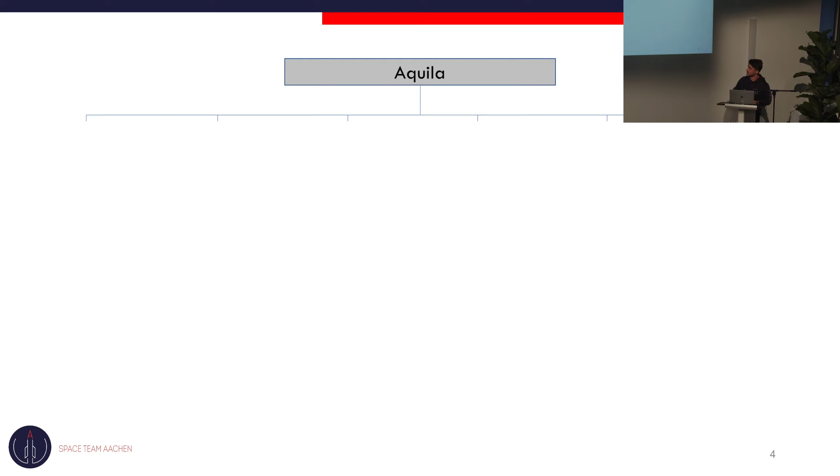So we have the mentors. The mentors are 3 people that already participated in EuRoC 2020 and 2021 and support us with their knowledge and some inside information that we need for the designs.

Then there's us, Tobias, Sandra, and me. We do the systems engineering and team leads. We keep track of the interfaces in our system, as well as that the timelines are correct and all the deadlines are met, these kinds of things.

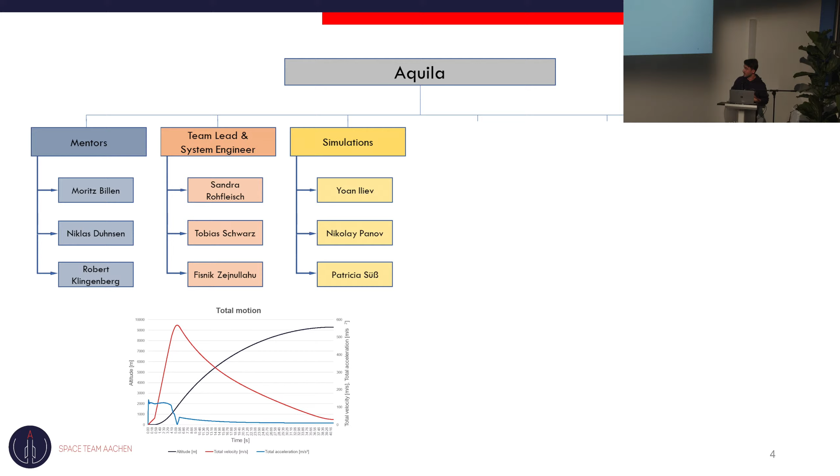Then, of course, the backbone of every rocketry, we have simulations. Simulations will predict our flight data, our trajectory path, and they are consisting of 3 people.

Then we have structures, of course. For the aerostructure, we need to have a team, and we have 5 of them who make body tubes, nose cones, boattails, and so on and so on.

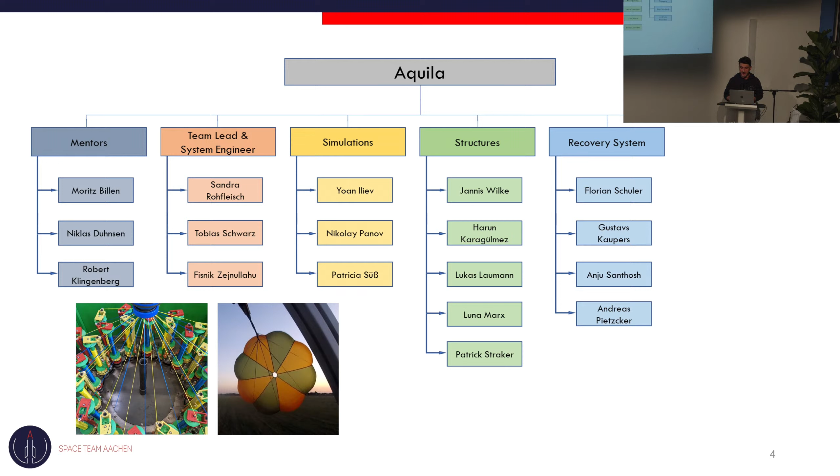Then we have our recovery system. We want to get our rocket back, and that's why we need a recovery system. For that, we have 4 people currently, and finally we of course have our avionics team that tracks all the data during the flight and also keeps track of our telemetry so we can find the rocket after it has safely landed.

So let's go on with our timeline. We actually started our project in November 2021, and we had quite a little hiccup in April when we wanted to participate at the EuRoC, but couldn't.

It was a little bit of a hiccup because we then decided, hey, what if we take more time and just have a better rocket that we can then launch in America as the first team ever, first German team ever to participate at the Spaceport America Cup.

So then we had an internal PDR where we presented our design to Space Team members. Then we had an external PDR where some of you already were in October. After that, we had the SAC application where we managed to be part of the 150 teams that participate there. And now we're here at the CDR.

Hopefully the feedback and the insights from the review board will not be too big so that we can freeze the design end of January and go into the production and assembly phase.

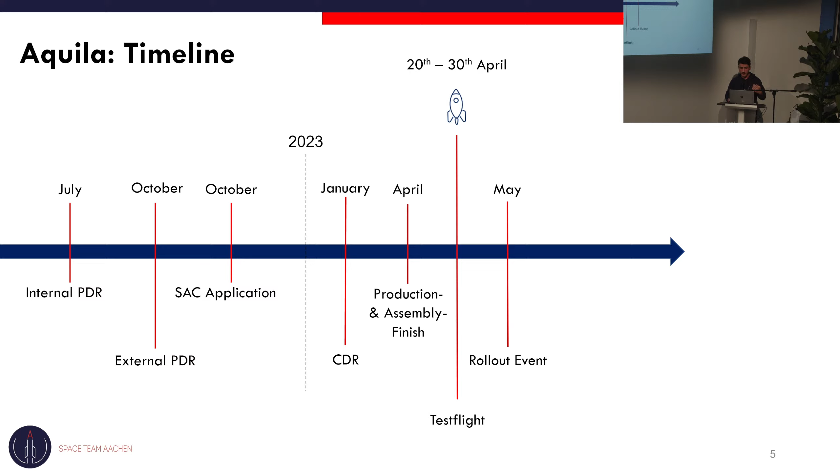And finally, in June, we will have the Spaceport America Cup in 2023. If we manage to get the rocket home safe and sound, we still want to participate at the European Rocketry Challenge 2023 and try to do what we already wanted to do last year.

Let's get into finances and sponsoring. Just a quick word about that. The blue things are traveling costs, the red things are costs that we need to build the rocket, on the left side. On the right side, that's our funds. You can see that we're missing about 11,000 euros, but that's because we didn't account for sponsoring, for material sponsoring and machining sponsoring. So that's more or less covered. We also cover part of the traveling costs with our personal money, because you can't bring everyone with the funds that we have to America.

So we're also paying our own money, and we are still in the process of getting funds by searching for foundations and applying for funds.

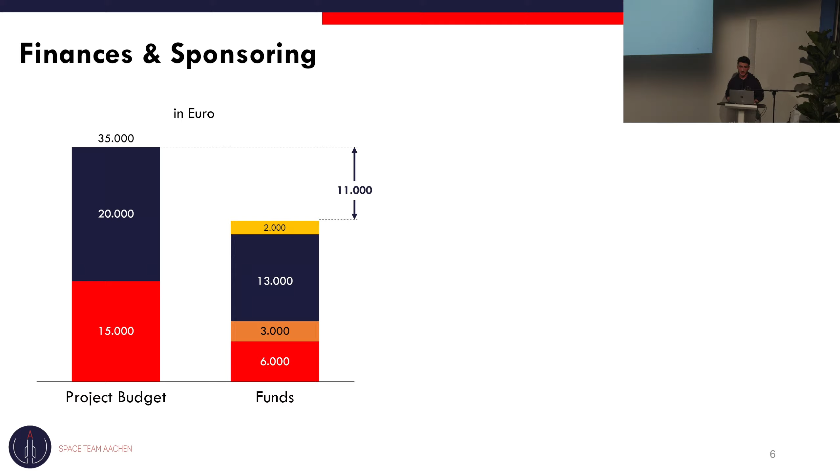Here are our supporters and our sponsors. Quick shout out to all of them. Materials and machining is really what saved us and made us our rocket.

So then I will give to Tobias.

Thank you, Fisnik. Also, hello from my side. First off, I want to thank you for attending the presentation, whether it's in person or by joining our online session. My name is Tobias. I'm one of the systems engineers of the project, and I want to talk with you about the key requirements that need to be fulfilled in order to participate at the Spaceport America Cup. I also want to give you a quick overview of our rocket design, and before we dive into our subsystems, I want to briefly show you the flight profile with a little animation.

So for the requirements, we have them divided into general requirements and specific flight requirements. Usually these kinds of competitions are divided into two categories, the 3 and the 9 kilometer category. The goal is not to fly as high as possible, but to reach a targeted height as precise as possible. Since Space Team Aachen already flew twice in the 3 kilometer category with CAR 1 and CAR 2, as Fisnik mentioned, we now set a new goal to fly in the highest possible category at the Spaceport America Cup.

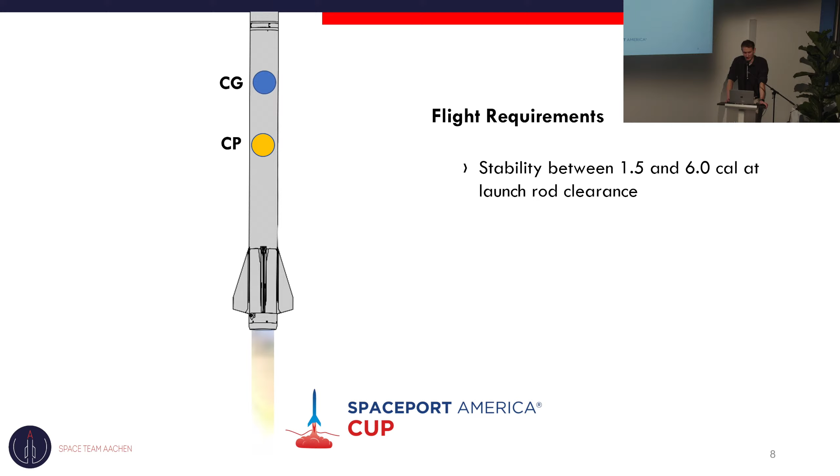So when the motor starts to burn, the center of gravity starts to move upwards, and therefore the stability increases. When we move faster, the center of pressure moves down, and the stability again increases. When we reach maximum velocity, the center of pressure moves upwards again, and therefore the stability decreases. So you can see the stability is not fixed and varies during the flight.

So why is it a problem when the stability is out of this range at launch rod clearance? When we are over 6 calibers, the rocket is referred to as overstable and therefore more likely to move into the wind, so you don't really want that. When the stability is under 1.5 calibers, it is referred to as understable, and the rocket tends to turn, even could turn towards you. That's normally something you want to prevent.

We also need to have a dual event recovery system where our drogue parachute is ejected near apogee. We need to have a descent speed of 23 to 46 meters per second with the drogue inflated. Our main ejection shall happen below 457 meters, and with the main ejected and inflated, we need to have a descent speed below 9 meters per second.

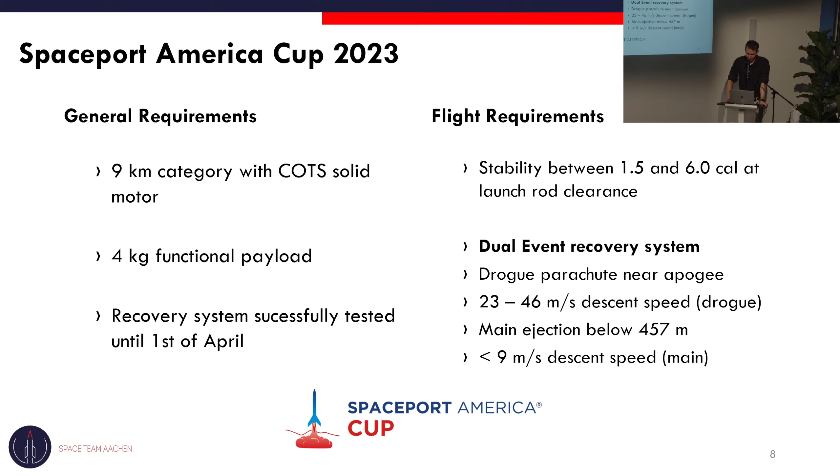So next I want to talk about our general design. That's how the rocket will look like. We will have a length of approximately 3.4 meters and a diameter of 11.4 centimeters. Our wet mass will be around 32 kilograms, that's with the propellant, and when the propellant is burned, we will have a dry mass of 21 kilograms.

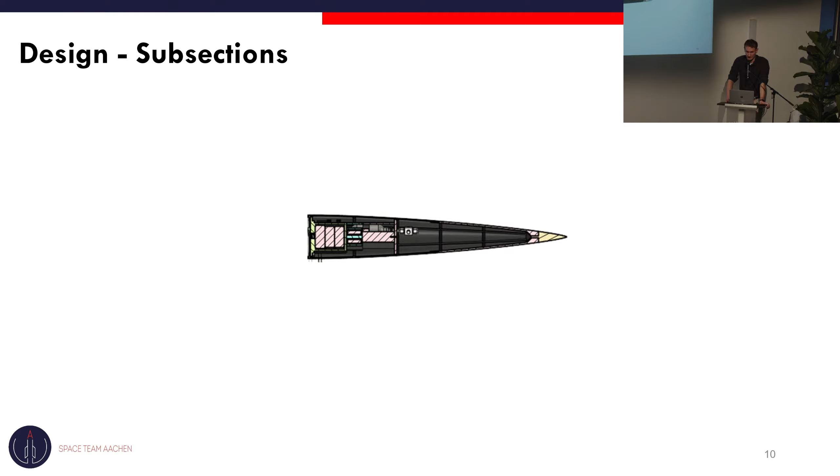So first start with the nose cone. The nose cone consists of the nose cone tip and the nose cone body itself. The tip is made of aluminum and functions as a heat absorber. Also, we have a heat and a pressure sensor located inside.

Then we also have the tower located inside our nose cone and our avionics tower, and part of the ejection system of our recovery system, the CO2 tanks are also located there.

When we go further down, we have the recovery bay, and we also have the nose cone bulkhead. So what is a bulkhead? A bulkhead basically connects and separates the different sections of the rocket and therefore allows easy access of each section. The convention we have is that we call the bulkhead below the nose cone the nose cone bulkhead, and for example, the bulkhead below the recovery bay the recovery bulkhead. So every time we talk about bulkheads, you hopefully know now which one we are referring to.

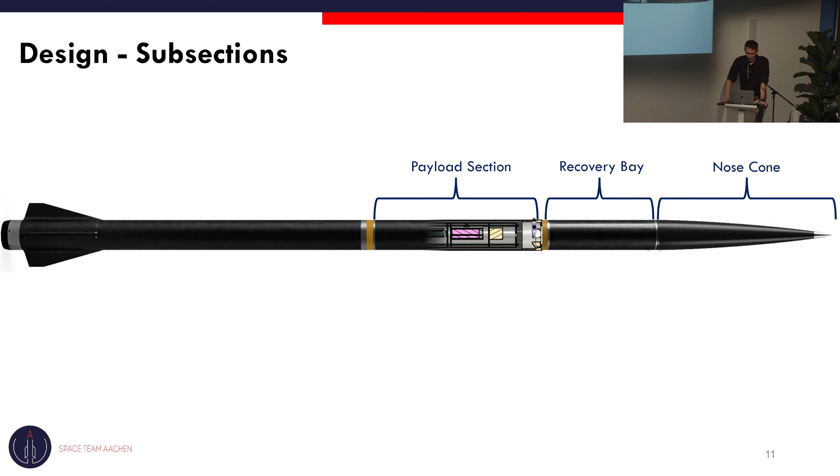Inside the recovery bay, we also have our parachutes located, and below the recovery bulkhead our payload section. For the payload, we will have a CO2 experiment where we basically suck in air during the flight and measure the CO2 concentration.

Below we have the payload bulkhead where we have one of our launch lugs. The launch lug is basically there to guide the rocket during the liftoff at the launch rail.

Below that, we have the motor section where we have our solid motor, the fins attached to the motor section tube, and the motor bulkhead where we have our second launch lug. Then we have the boattail, and the boattail is there to reduce the drag during the flight and to hold the weight of the rocket.

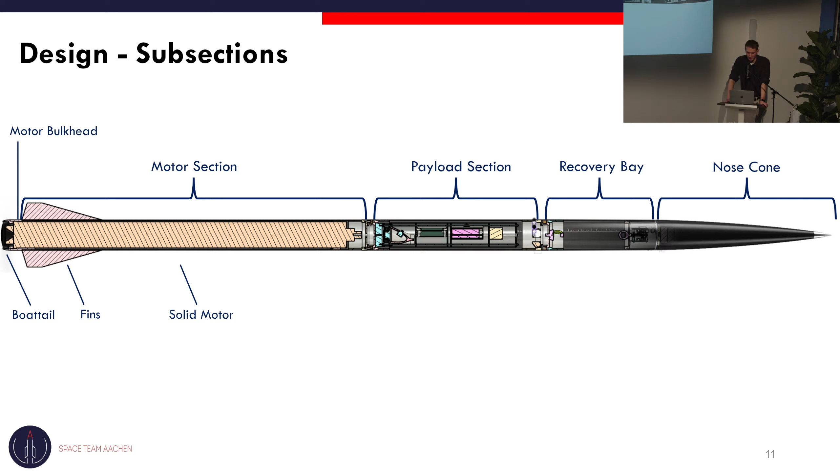So here you can see a full cross-sectional view of our rocket. Before I go to the flight profile, I will just mention some stats about our motor. We will have a Cesaroni N3301 motor with 19.3 kilonewton seconds total impulse and a peak thrust of 5 kilonewtons.

We will therefore, with that motor, have a maximum velocity of Mach 1.68 and will slightly overshoot with 9.3 kilometers altitude. Our maximum acceleration will be 15 g, and we will have overall stability during the whole flight of 2.9 to 6.4 calibers.

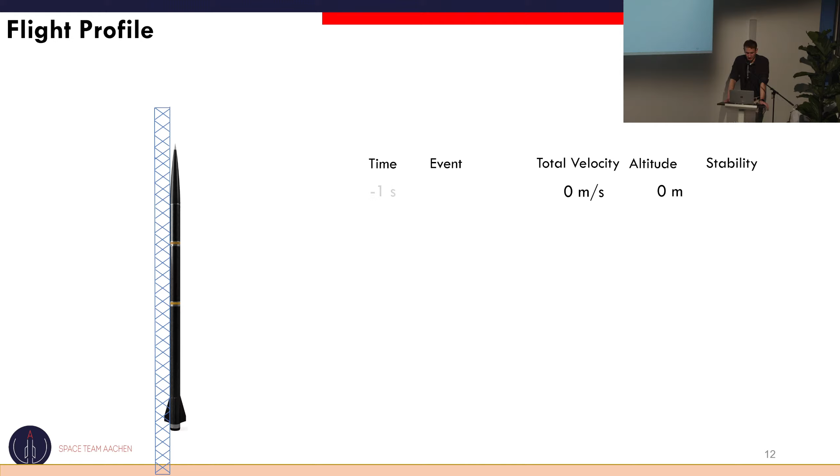The first event will be the liftoff, where we will have 2.9 calibers and therefore meet the required 1.5 to 6.0 calibers at launch rod clearance. After that point, we reach maximum velocity at an altitude of 1,700 meters, and afterwards we will have the motor burnout. After 10.4 seconds, we reach maximum stability, which is the mentioned 6.4 calibers, and we will reach apogee after 41 seconds.

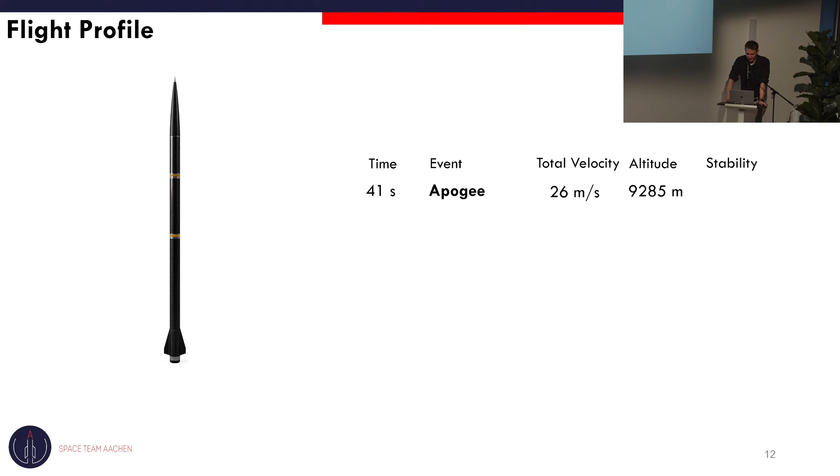One second later, we will deploy the drogue parachute. With the drogue deployed, we will have a velocity of 24 meters per second. Afterwards, with the main deployed, we will have 8 meters per second, and then touchdown after 369 seconds.

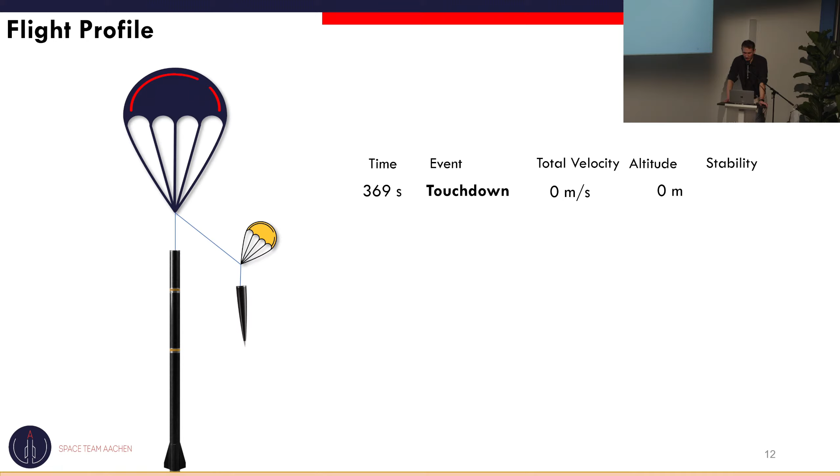I'm the lead of the simulation sub-team for the rocket Aquila. I'll be presenting the system data. Thank you for attending, and thank you to everyone who is online.

First, we're going to go to the simulation models and programs used in analyzing the rocket. Then we'll go to the flight profile and flight parameters, and the force profile as well. We're going to take into account wind influence, do a software comparison which was the target of the simulations team, go over our CFD results, and finish with the timeline for the simulation sub-team.

The simulation sub-team was focused on analyzing the performance and behavior of the rocket. This is our first supersonic project, so it was a challenge to determine a methodology for simulating our supersonic rockets. This was our task: to develop and establish a methodology for the space team to use for future projects, including supersonic rockets.

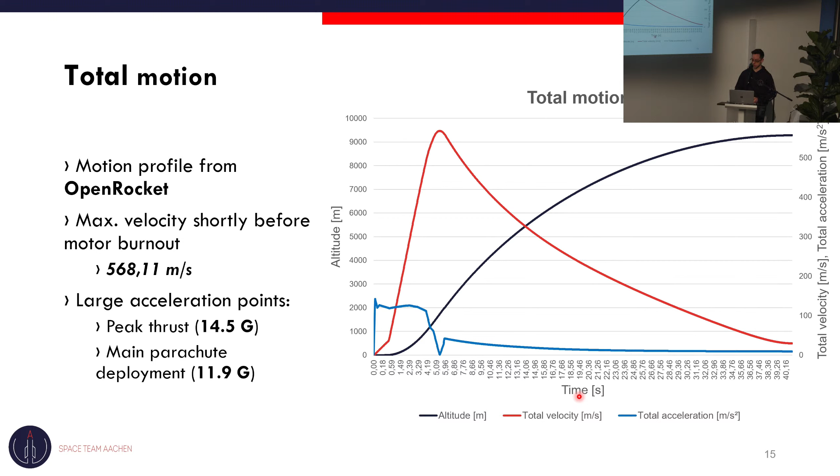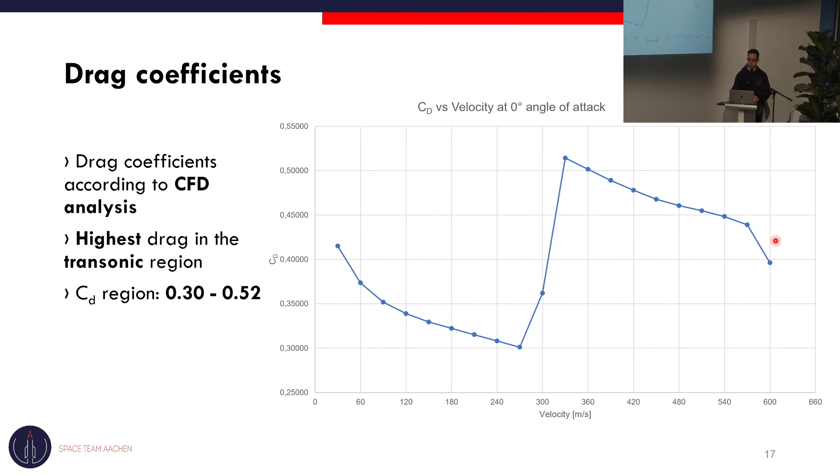Then we pick up speed, our drag increases, and our drag at max Q, that means maximum aerodynamic loads, is about 750 newtons. The other main load on the rocket will be the main parachute deployment. It leads to a large deceleration, about 2 kilonewtons.

And then we're going to land the rocket with the main and drogue chutes deployed, and we're going to land it at about 8.1 meters per second, which with our dry mass corresponds to a kinetic energy at landing of about 725 joules.

All right, this was the flight profile and the force profile. We're going to take a look at the wind influence. We also analyzed the winds to make sure that the loads on the rocket are not too high, don't cause vibrations, that the rocket is not overstable, and to look at what happens at high wind speeds. The maximum wind speed allowed for launch is 8 meters per second at ground level.

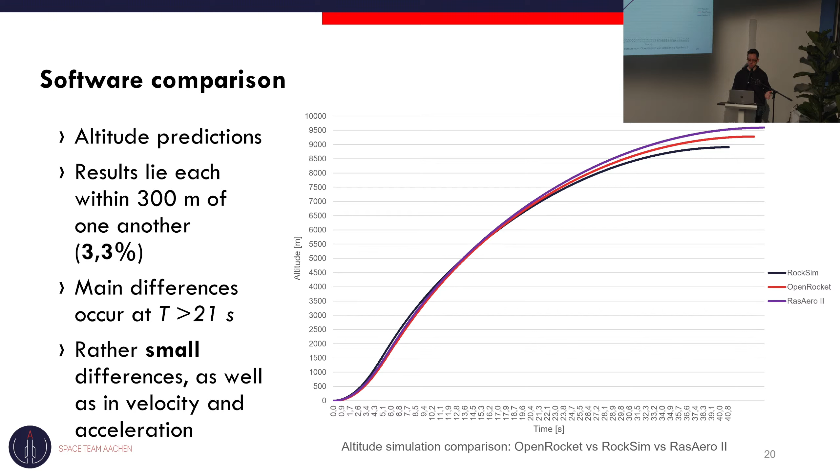And of all, CFD gives the lowest values, therefore we expect if the CFD results are successfully validated and correct, that the rocket will go actually a bit higher than those programs predict. Not a whole lot, but a little bit.

The other big difference is in the center of pressure and respectively in the stability. This is important for us because we need to dimension our fins and aerodynamic surfaces so that we are stable. As you can see, OpenRocket could be misleading in this way.

It says that the center of pressure is much further than the CFD analysis says. We were surprised that RasAero II and RockSim don't give any logical values. What I mean is that we expect the center of pressure to rise with speed, then drop as we go supersonic, and then go back up. Those two plots don't show it, but the CFD results show what we expect.

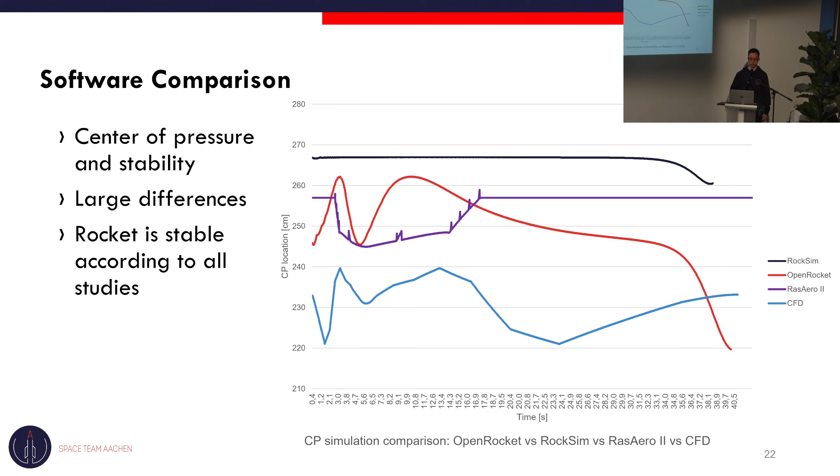The CFD results show that the center of pressure is much further than OpenRocket predicts, and therefore the stability can reach some lows. Those lows are not lower than 1.5 caliber, so the rocket is absolutely stable, and this is verified through the CFD analysis. We can also analyze the stability with OpenRocket, but we need to take all results with a grain of salt.

Last but not least, we're going to take a look at the computational fluid dynamics. We did this in order to evaluate the softwares we want to compare, and we wanted to get a better overview of the mechanical loads, the thermal loads, and the flow topology of the rocket that we can expect. So we're going to have a brief look.

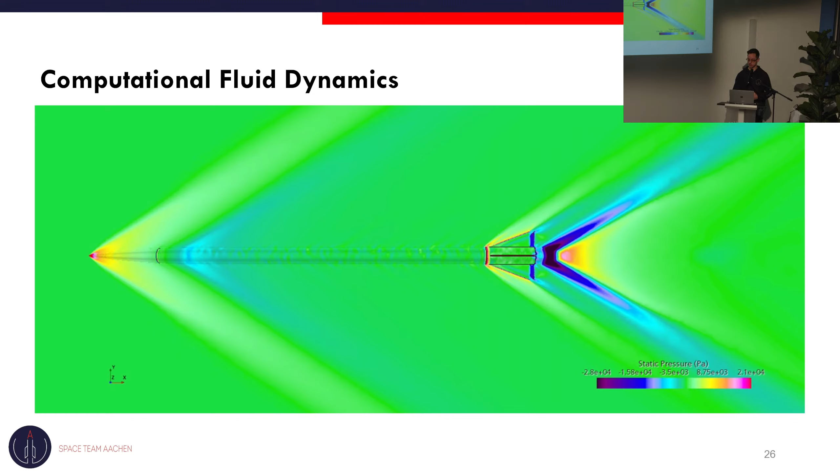With this, our system data chapter concludes. I want to talk briefly about the next steps of the simulation team. We plan to validate the CFD methodology. We're going to do a mesh validation and code-to-code validation in collaboration with the DLR.

Basically, the mesh validation is tested with different meshes so that we can determine if the mesh influences the simulation results in any way. And the code-to-code validation is to test the solver, checking if it predicts accurately the flow topology and the metrics.

After this, we're going to use the CFD results and integrate them into ASTOS, another trajectory simulation tool. We'll simulate the trajectory through ASTOS and compare it again with the other software. Then we're going to do Monte Carlo simulations for the prediction of the landing site.

After that, we're going to do a final simulation cycle with real-world data when the rocket is getting built. We're going to weigh each component, build even more precise models, and do a last simulation cycle.

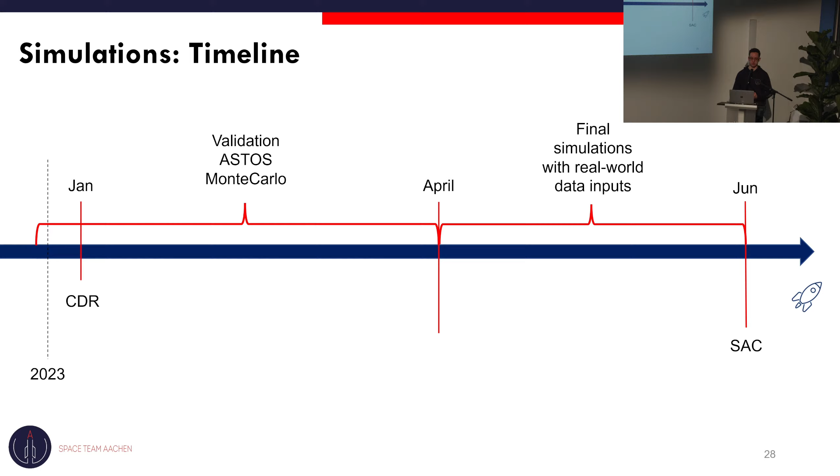So how are we going to distribute this in our timeline? We are here at the CDR. We are currently working on validation and ASTOS. Once we finish them, we're going to start with Monte Carlo simulations. Our plan is to get it all done by April. After that, when the rocket is built, we're going to take on the final simulations with the real-world data.

So that's it from my side. Thank you all, and I'll give over to Yanis with the structures part.

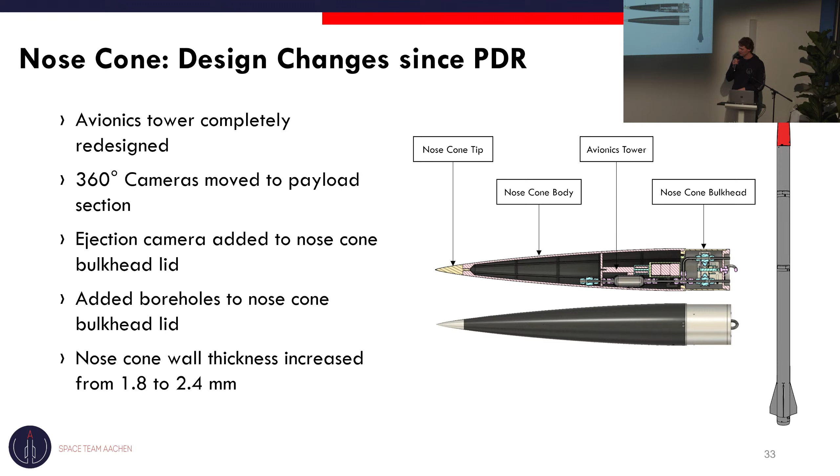Finally, we decided to increase the nose cone wall thickness from 1.8 to 2.4 millimeters. This is the nose cone. We selected an aluminum alloy. Other than that, not much has changed.

We are still a little bit uncertain of how we're actually going to manufacture these boreholes, as they are quite small, but have a high length. We are in discussions with the WZL, which is the Laboratory for Machine Tools and Production Engineering here in Aachen. We'll have a meeting about this next week.

But because this is just an auxiliary system of Aquila and not part of the critical design, if this ends up not working out, this is not in detriment to the overall success of Aquila, so it's not a main priority for us. Okay, moving on to the avionics tower.

This is the old design. And this is a new one.

As you can see, we've managed to, in my opinion, make the whole design a lot more elegant. We've shrunken down the whole design. It's a lot easier to print. It now features mounting points, for example, the CO2 tank.

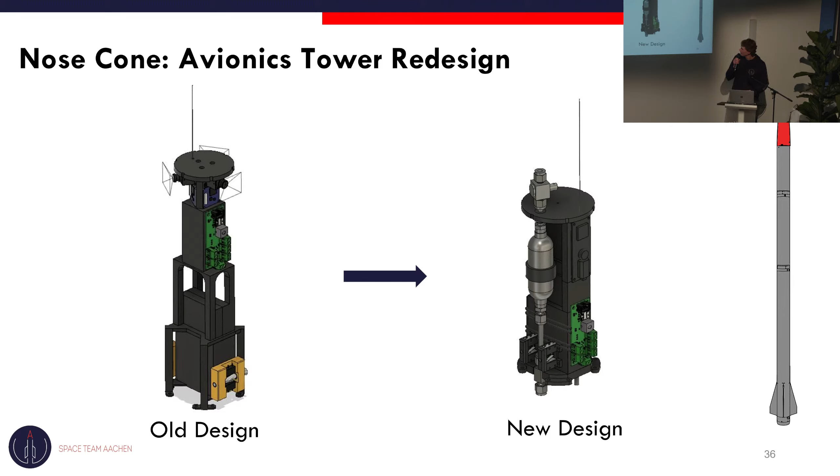And as you can see, it does once again feature all the components and features that we need to host all of the avionics and recovery systems.

Then the bulkhead, nothing much has changed for the nose cone bulkhead. We have selected an aluminum alloy, as you can see. And then finally, we did add some more boreholes to support additional functionality for the recovery team.

These are manufactured components that we have already assembled. We have assembled and manufactured every component of the nose cone except for the nose cone tip. And I do want to point out that we have at least 2 of each component, so we're already redundant and have spare parts available for everything.

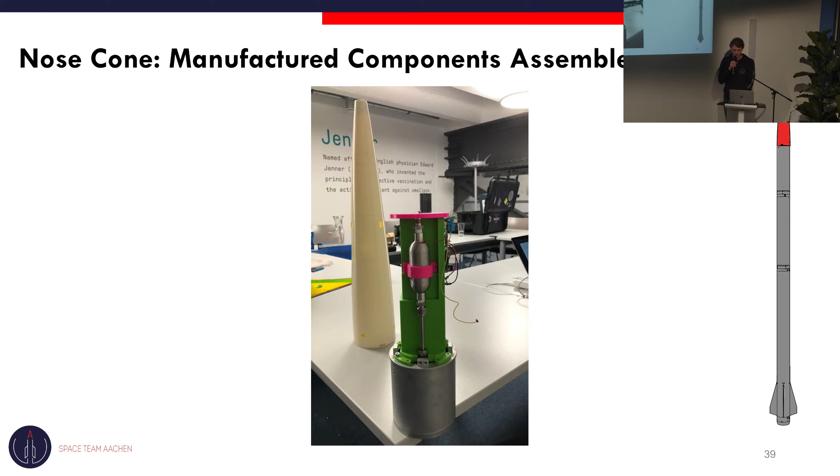Okay, so moving on to the body tubes. Maybe I'll give a quick recap for those who haven't attended the PDR. We wrote an entire project thesis where we compared different manufacturing techniques of how to produce carbon fiber reinforced engine tubes for rockets. In that project thesis, we selected 2 different manufacturing techniques, which is first of all split molding and roll wrapping.

And ever since we concluded this project thesis back in September or beginning of October, this whole topic has been figured out, so no changes since the PDR in that regard.

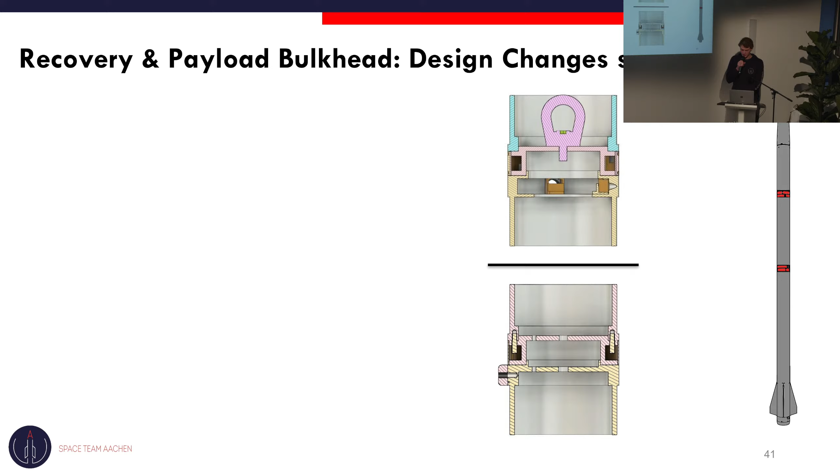Now I'm going to talk a little bit about the recovery and the payload bulkhead. Some significant things have changed with those designs since the PDR. First of all, we did select an aluminum alloy.

We set a length for the adhesive surface length of 50 millimeters, and we also selected a glue, which is the DP490 by 3M. We also selected an anchor point.

We added, well, as I mentioned before, we moved the 3 cameras down from the nose cone to the recovery bulkhead, and we have added some recesses to actually find space to mount these cameras. And then lastly, the launch lug has moved from the recovery down to the payload bulkhead.

Okay, then the fourth and final bulkhead is the engine bulkhead. With this one, we've selected an aluminum alloy. Other than that, no design changes.

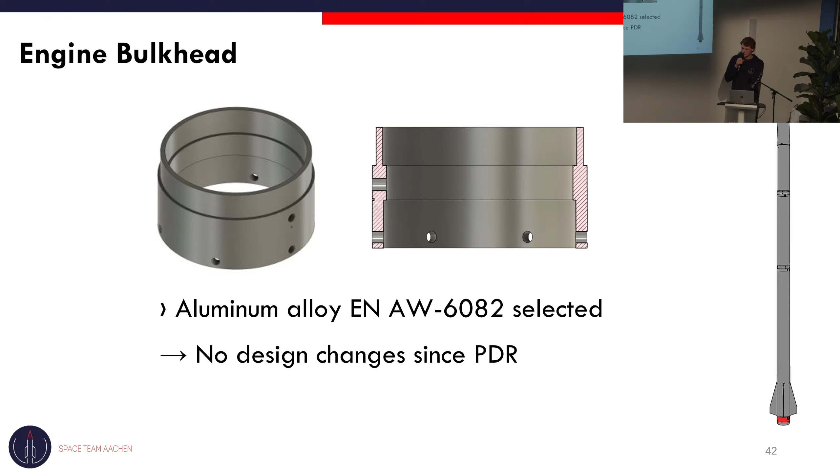And then moving on to the boat tail. The current idea of the boat tail has not changed, and we are planning on 3D printing the boat tail using PEEK and PA reinforced with carbon fiber.

But we are currently in the process of writing a bachelor's thesis about how to implement a crush core design into the boat tail. And in that case, we would use a metal 3D printer to manufacture the boat tail.

However, as the bachelor thesis has not progressed far enough, the decision of which design to go for is still pending the results of said thesis. But even if it turns out that it's not feasible to add a crush core, we can always go back to the current design. So this does not present any significant risk for Aquila.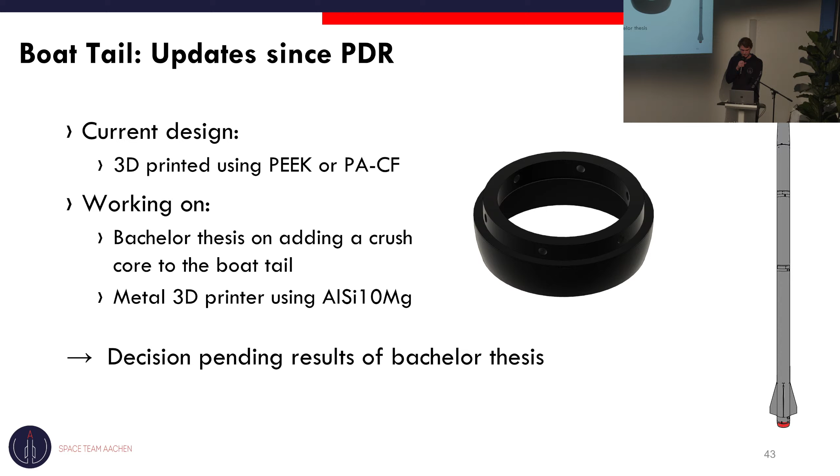And now to the fins. The fins have progressed quite a lot in the past couple of months. We have selected an epoxy, and we also selected a glue. And we updated the fin shape, moving from a trapezoidal shape to now using a clipped delta shape. This made it necessary for us to redesign the mounting rig of the fins. We've concluded doing that.

And we have also, as you can see in the two pictures, manufactured our first fully working fin cans. And then finally, with regards to the structural updates, we've got the launch lugs. As I mentioned before, the upper launch lug has moved from the recovery to the payload bulkhead. Other than that, once again, there hasn't been any significant changes since the PDR. This concludes the structural updates.

Now, in regards to our timeline, one or two weeks ago we just concluded our test campaign and validation phase, and we're quite happy with how that turned out. I'll be back here later on to talk a little bit about that. But for now, today we've got the CDR, and obviously we're waiting for your feedback.

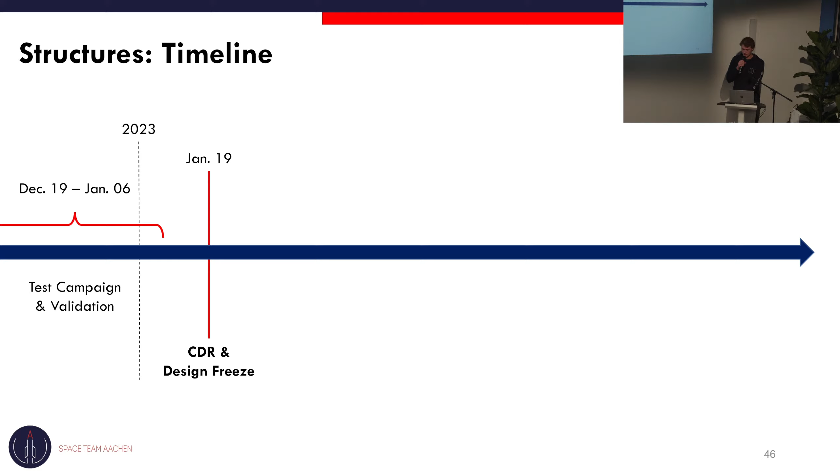After that, we are hoping to freeze the design of the structural components of Aquila, and then we'll move on to actually manufacturing and assembling the first instance of the Aquila rocket. Up until roughly the middle of April, we have quite a solid plan lined up to make that work, so we're ready just in time for the test launch that will take place at the end of April.

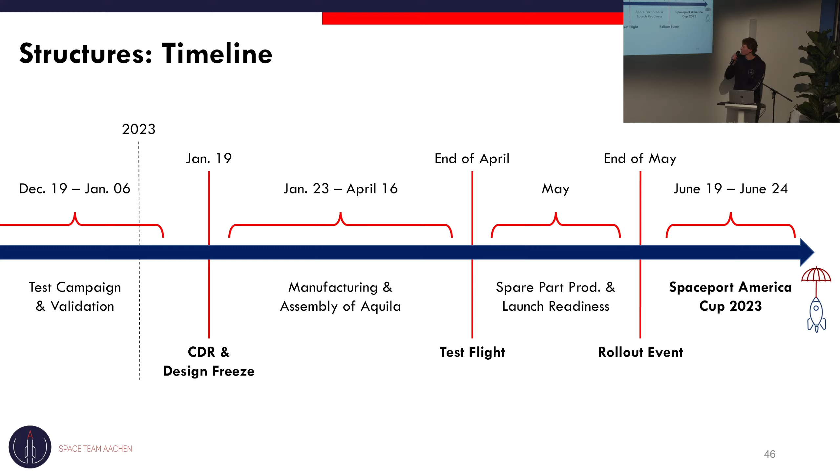After that, in May, we'll work on producing spare parts. Our aim is to have full redundancy and have at least one spare part component available for every part of the rocket. And then finally, we will also work on launch readiness, meaning we will review our checklists, practice the assembly, and all that. Then we'll have the rollout event at the end of May, and excitedly, we will have the launch of the Aquila rocket at the SAC in June.

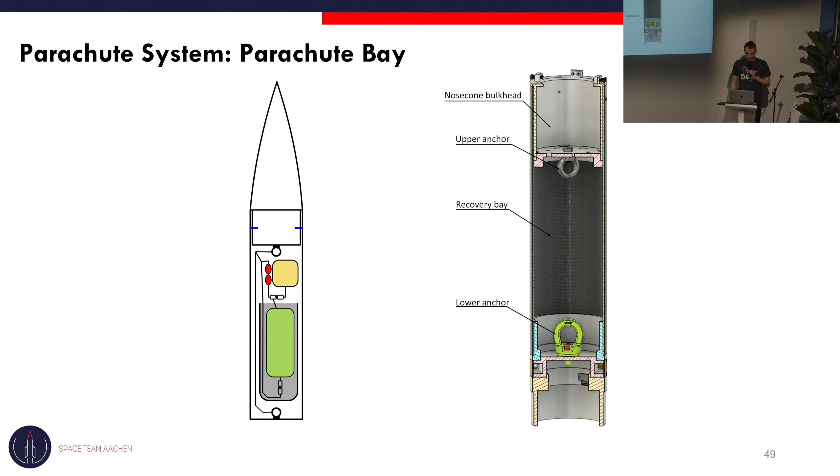Of course, we need the shock cords to connect every part to each other. The shock cords are manufactured here at the RWTH Aachen at the Institute of Textile Technology. We will use a 24 filament Dyneema rope, and it will be packed neatly inside the tube.

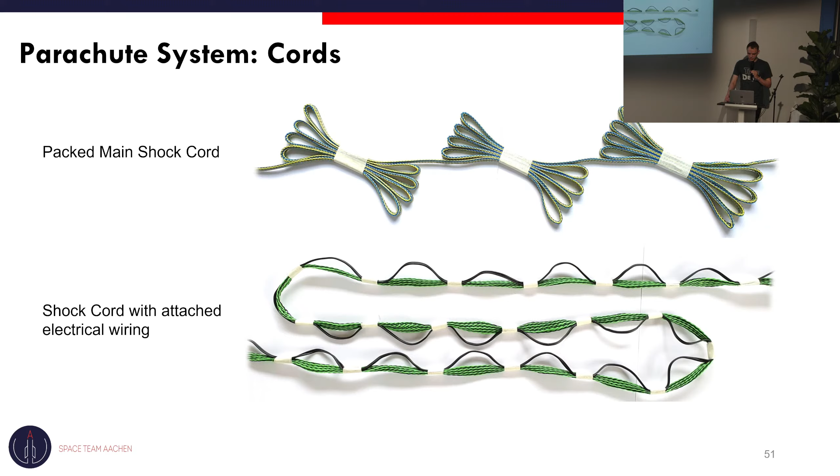Of course, we need to protect the cords. So if the cords rub or have the chance to rub against something like a sharp edge from the carbon fiber tube, we apply a protection sleeve. This protection sleeve is going to be made out of Kevlar and is going to be tightly wrapped around the rope so that we lower the risk of damage during the descent.

We selected ripstop nylon for both canopies. The main parachute canopy diameter is 3 meters, and the drogue parachute canopy diameter is 0.9 meters. Ripstop nylon is commonly used in parachutes, and we use an elliptical shape for its simplicity and relatively high drag coefficient. We also did tests about that, but more on that later.

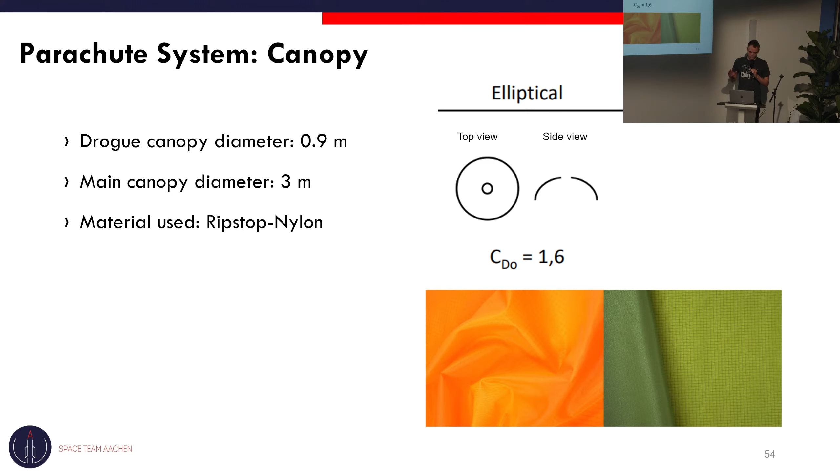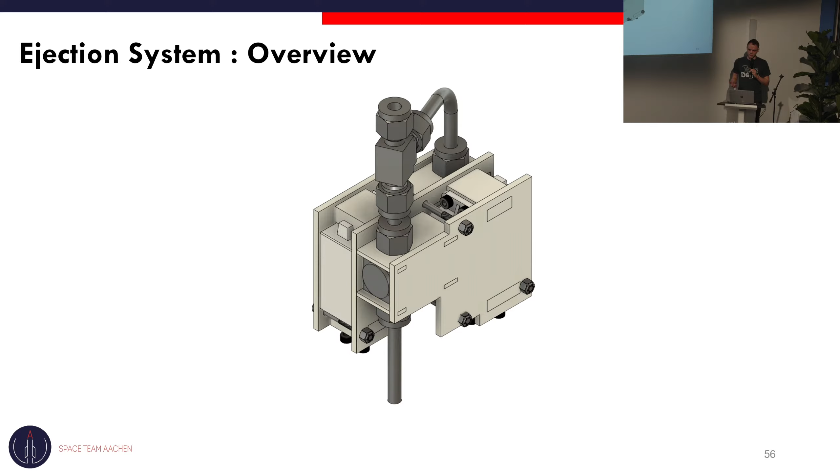Here's a closer look. You can see it consists of 2 identical valve assemblies. In this picture and the other pictures, it's only connected to 1 tank, but in the future we will probably change it to 2 tanks, so it's a fully redundant system.

Each of the valve assemblies consists of a ball valve with an electric motor and a switch. When the electric motor gets its firing signal from the avionics, the ball valve turns, the switch activates and gives feedback to the avionics, and the CO2 rushes out of the tank into the recovery bay, pressurizing it and popping off the nose cone with the bulkhead that was previously held in with shear pins.

The procedure is as follows: first we connect everything, then we open MV1 and MV3, then fill the main tank with CO2 purged through the EV1 and EV2 valves, and close everything back up and vent through the MV2 valve.

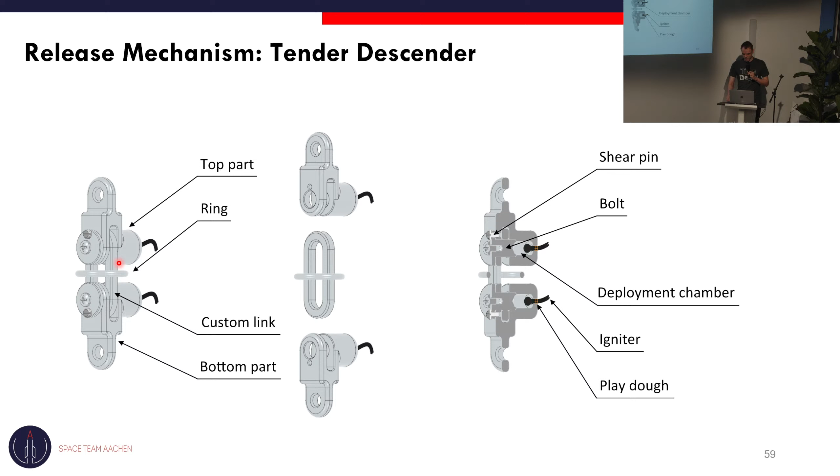The other release mechanism is called a decoupler. It's also self-developed. It uses a ball bearing locking mechanism, so you have an electric motor that turns a camshaft. When the camshaft is turned, the three balls can fall to the inside and the cap is released.

Now let's talk about the whole sequence. As I mentioned before, the drogue parachute is deployed and pulled out by the ejection. Then it unwraps from its Kevlar blanket that protects it against the CO2 charge. The drogue parachute pulls out the rest of the system, the ropes and the main bag.

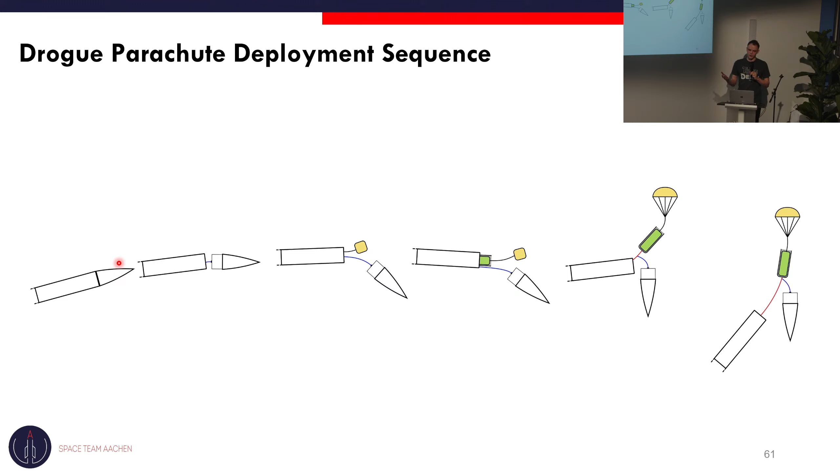Then at roughly 450 meters, the avionics trigger the release mechanism and the main parachute inflates and sinks to the bottom slowly and safely.

Now to the timeline. We have the 19th of January with a CDR. After that we have to do a little bit of validation, and we have done some, but not all is concluded yet, but I will talk about that later. Then we will manufacture all the components we need for a successful flight.

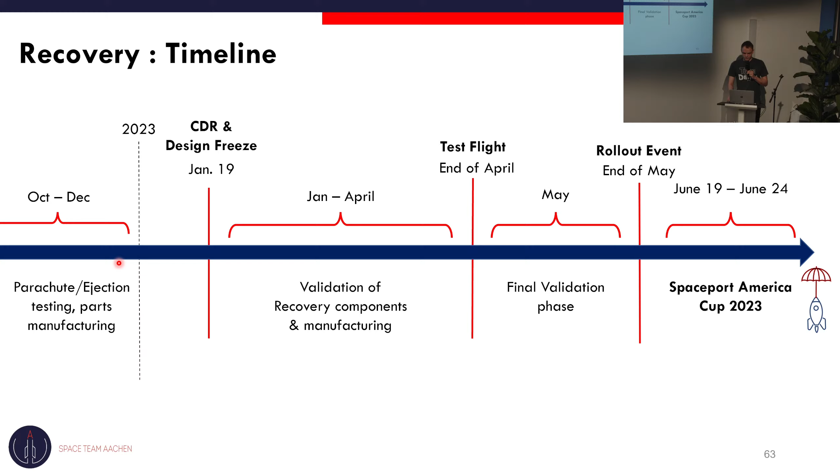Thank you very much. I'm Johan Schepke, the head of the avionics team of Aquila, and I'm going to walk you through the electronics that we designed for our rocket.

As the avionics team, we have two main mission goals. The first is to trigger the parachutes at the right moment. The second is to find the rocket after it's landed somewhere in the desert, meaning we need to send back its location, which we call telemetry. Furthermore, we implemented a few other systems we call the auxiliary systems, and on our self-developed hardware there's running self-developed software.

First, we'll take a look at our recovery system. It's split into two parts. The first part is commercial off the shelf, meaning we have a flight computer that is fully able to deploy both parachutes at the right moment, and we have a second one which is able to do the same thing. The first one is commercial off the shelf, meaning we buy it and install it inside the rocket. The second one is a self-developed option, which I'll go into more detail on now.

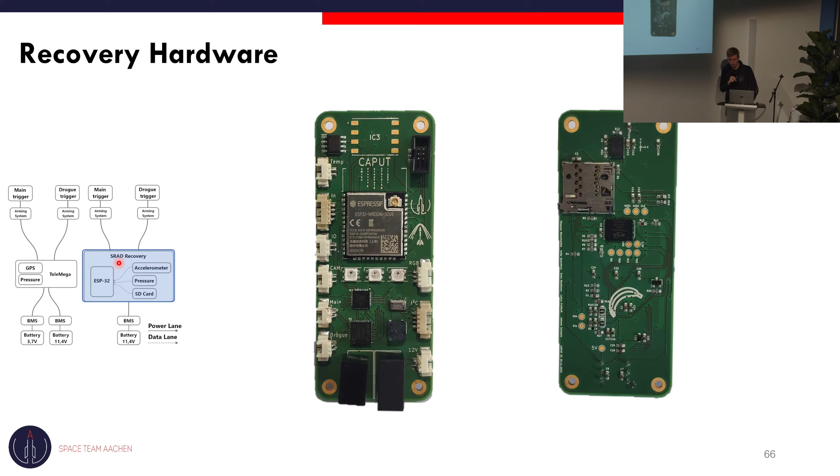That brings us to the board flight computer. We use the Altus Metrum TeleMega. It offers up to 6 outputs to control the parachutes and offers a GPS antenna and telemetry, so we are using the Telemega as our main telemetry computer.

To ensure that none of the flight computers deploy the parachutes when we are not ready, meaning when we are still on the ground, we are implementing an arming system. This arming system physically disconnects the flight computers from the ejection. We have switches which disconnect the wires coming from the flight computer and going to the ejection mechanism. When we are ready to lift off, we screw in a screw between those two switches and ensure that we are ready to fire the parachutes.

Now we come to the power supply of both of our flight computers. We are using lithium polymer batteries, and multiple batteries, as we have a fully redundant system. For our Telemega, we are using a 1S 1000 mAh LiPo battery, which should give us around 11 hours of runtime, far more than we actually need. But if we have delays on the launch pad or struggle finding the rocket after it's landed, it's better to have more than we need.

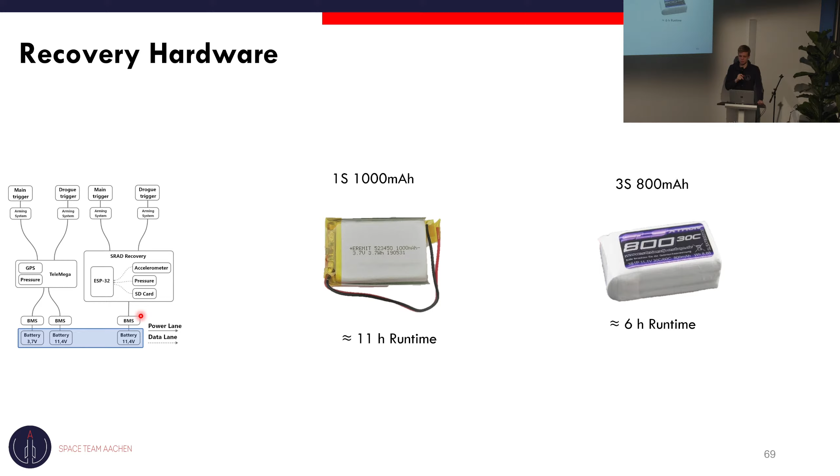For our self-developed option, we went with a smaller battery, a 3S 800 mAh battery, which should give us around 6 hours of runtime. But as our self-developed option is not necessary to recover the rocket after it's landed, this is more than enough. Furthermore, our batteries are protected by a battery management system. This is a commercial off-the-shelf battery management system, which allows us to protect our batteries and flight computers from accidents. That was it for the recovery hardware, which brings us to the telemetry.

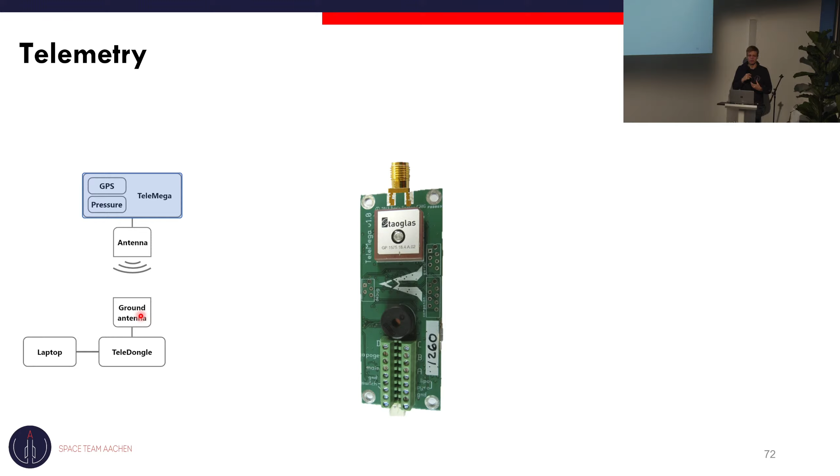The telemetry, as already said, is based around the Telemega. The Telemega has the GPS antenna and a radio on board, which sends back the location to the ground. It does this by means of a monopole antenna, which offers linear polarization and is located on top of our avionics tower inside the nose cone.

On the receiving end of our connection are 2 antennas. The first is a Moxon antenna, and the second is a Yagi-Uda antenna. We multiplex these two antennas together and interface them into the teledongle, which is the receiver for the Telemega. This teledongle is then connected to a laptop running the receiving software of Altus Metrum and displaying the data that we need to recover the rocket.

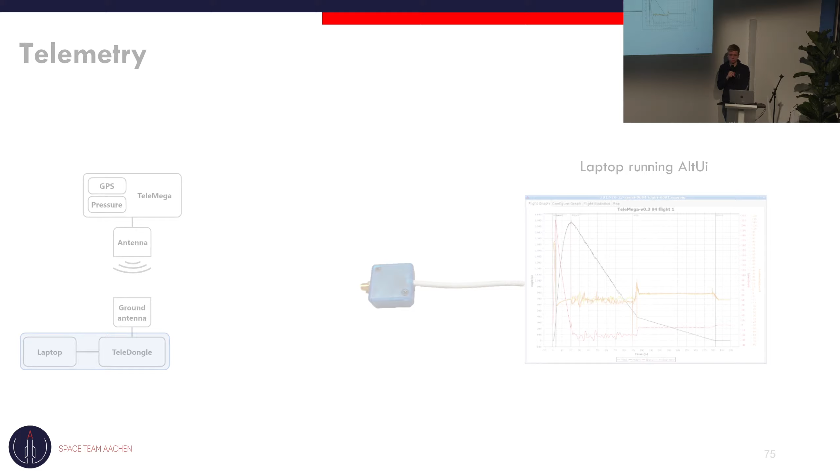For the sake of redundancy, we implemented a second tracking option, a so-called LoRa beacon. This is a small device sending off a signal of its location, which is picked up by our ground station, a small off-the-shelf LoRa gateway also connected to our laptop. As LoRa is a standardized protocol, we have the option to receive the signal from other sources. That means many teams in the SAC will use the LoRa protocol, so there's the option that one of their ground stations picks up our signal, and there are commercial providers of LoRa networks which can also pick up our signal, and we can get our rocket from them.

As those beacons offer a battery lifetime of around 2 years, we are able to find our rocket even if we are struggling to find it immediately.

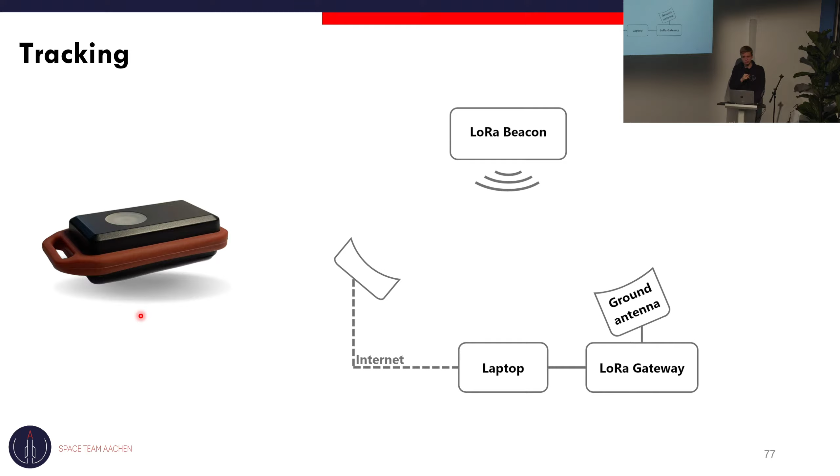That was it for the mission relevant part, and brings us to the fun stuff, the auxiliary systems. For the auxiliary systems, we implemented a dynamic pressure sensor, a temperature sensor, and as already mentioned, a separation camera.

First of all, we're going to take a look at the dynamic pressure sensor. A dynamic pressure sensor allows us to determine the actual airspeed of the rocket. We do that by taking a pressure measurement in line with the flow and one orthogonal to the flow. By comparing these two measurements, we can derive the actual airspeed of the rocket in the subsonic regime.

That brings us to the already mentioned separation cam. The separation cam is looking downwards into the recovery bucket, into the recovery tube where the parachutes are housed. That means at apogee, as soon as our nose cone is ejected, we should get a good view of the drogue deployment and later of the decoupler deploying the main parachute.

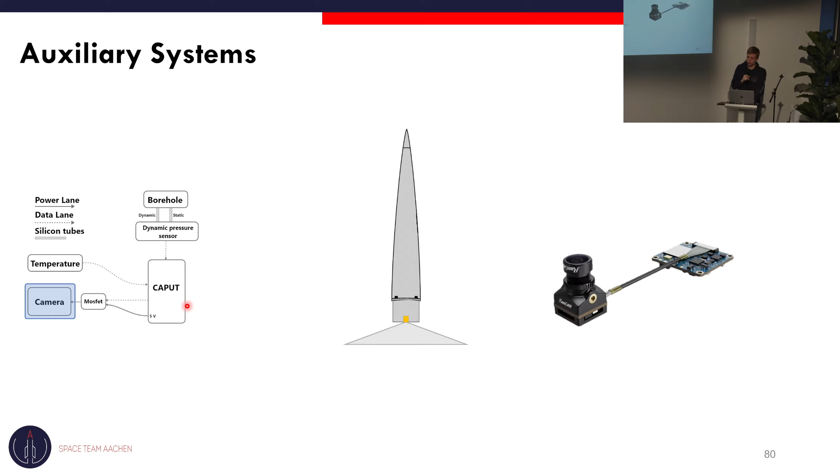Furthermore, we have an additional temperature sensor inside of the nose cone tip. This is going to help us validate our simulation models by recording the temperature in the tip of the nose cone and comparing it to our simulated results.

All of these sensors record their data onto our main flight computer and will be analyzed after the flight and not be used for the actual flight itself. That was it for the hardware part of things, and brings us to the software that's running on our flight computers.

Our software is based around a so-called state machine. The state machine offers simple conditions to move from one state to another and ensures that our events are following a certain order. Basically, it means that we can't deploy our apogee parachute before we lift off.

If we take a closer look at these conditions, for example, if we transition from coasting to descent, that means that's the point where we want to deploy our drogue parachute. We need to get a vertical velocity smaller than 0. To determine our vertical velocity, we need sensor data, and the sensor data in our case is mainly the inertial measurement unit and the pressure sensor.

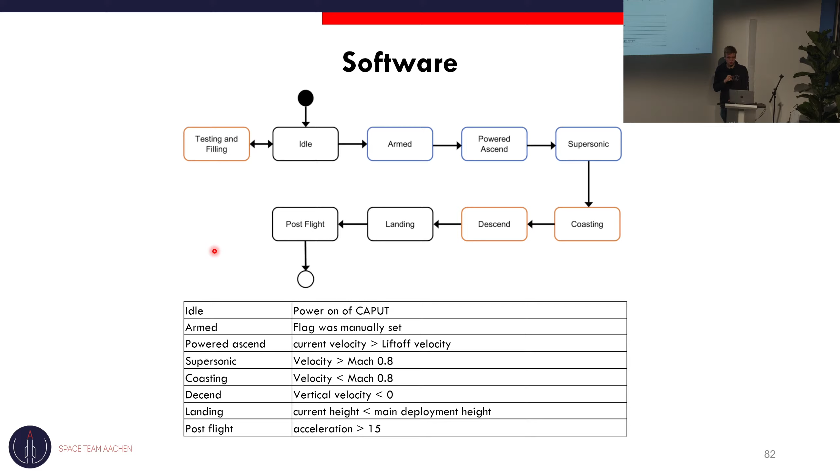As you can see here, the inertial measurement unit records the data in its local reference frame. That means it records, for example, right now the y-axis is our vertical acceleration. But as soon as we lift off, the rocket starts to pitch downrange, which means our axes are swapping. When we are at apogee, our x-axis is our vertical acceleration.

That means we can't just take one axis and integrate it to get our velocity, but we need to rotate our coordinate system. That means we need the actual angle of our rocket. We do that by integrating all of our gyroscopic rotational speed measurements and correcting them for drift. And afterwards, we rotate our acceleration measurements into a global reference frame.

And from that, we can derive the speed of the rocket, the vertical speed of the rocket, and the height of the rocket by the means of a Kalman filter. A Kalman filter offers the option to reduce the sensor noise and fuse two sensor sources together and output the things that you want. In our case, the height and the vertical velocity.

That means we have finally the height and the vertical velocity and can trigger our simple conditions and therefore trigger our state machine one after another and determine successfully all events of our flight.

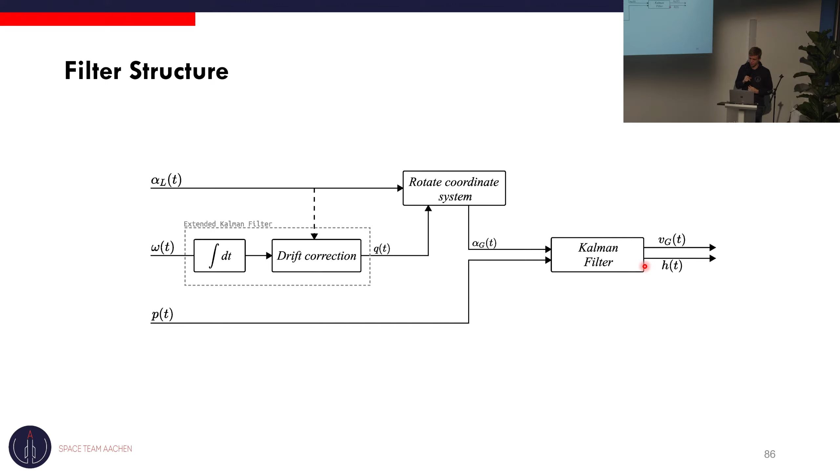That brings us to what's coming next. Currently, we are in the final phases of our hardware and software development. And after the CDR is finalized, we will go over into our testing and validation phase and simultaneously develop the payload electronics, which will be further explained by Lucas in a few seconds.

After that, in the end of April, we will have our test flight. This will allow us to verify all of our systems and verify that our flight computer is working properly.

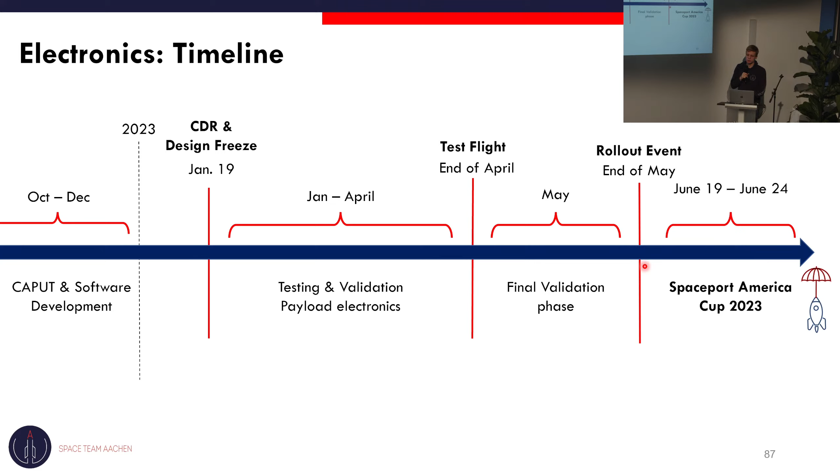And after the test flight, we will also go into a final validation phase, which will be focused on ensuring that our flight computer can't trigger in the transonic regime and working out all the final kinks of our system. After our rollout event, we will ship off the rocket to America and we will launch and land successfully there. Thank you very much.

I will give over to Lucas for the payload. Thank you very much, Johan. Hello, everyone, and good evening. My name is Lucas, and I am responsible for the payload of our rocket Aquila.

At first, I want to go over our requirements for the payload, give you an overview of our experiment and what we are trying to do with the payload, then how we designed this experiment, and also talk a little bit about the cameras and the electronics supporting the whole payload.

The requirements are mainly set by the Spaceport America Cup. We have to hit a certain weight target of 4 kilograms in total, where only 1 kilogram is allowed to be a dummy weight. So the airframe for our payload has to be at least 3 kilograms, including all sensors and electronics and batteries and so on.

Also, the payload has to be fully removable, so SAC personnel can actually weigh the payload before liftoff and verify our weight. Also, it has to be a passive system, so it has to be fully replaceable by a dummy weight of an equivalent mass without changing any flight parameters or interfering in any other systems.

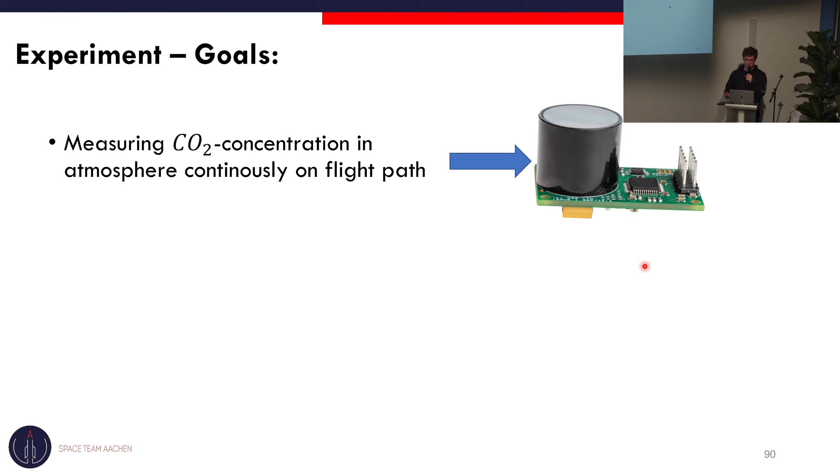The goals of our experiment are to measure the CO2 concentration in the atmosphere continuously along our flight path, meaning we will collect 2 data points per second with our CO2 sensor. The second goal is capturing a panorama video of our flight using 3 cameras that are placed in a ring, looking in every direction, covering a 360-degree view of the launch site.

The design, as you can see here, we'll go from the top. Here you see the recovery bulkhead, and the cameras are integrated into the recovery bulkhead, which is really cool because it's not necessary for us to cut into our carbon fiber tubes for the camera holes. The recovery bulkhead also features the air intake, so that we can replenish the air inside the payload continuously, which allows us to sample new air and not sample the same air over and over.

Under that, we have the weight, just a dummy weight of 1 kilogram, the exact allowed dummy weight mass. Under that, we have the batteries. There are 2 batteries which will make sure that our payload will function for hours, and does not make it necessary to load on the launch pad or to charge our batteries on the launch pad.

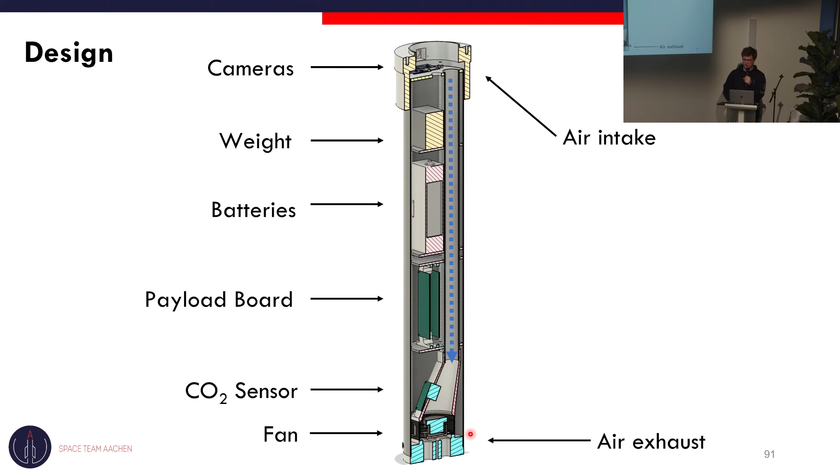For the airflow, we are using a relatively standard PC fan that can move enough air to enable the airflow inside the payload. The air will come in from the top and will be guided through a tube down to the fan and the CO2 sensor, and the exhaust is in the bottom, as I already said. This reduces the actual volume of air that has to be moved, so we can use a less powerful fan because we have to move less air per second.

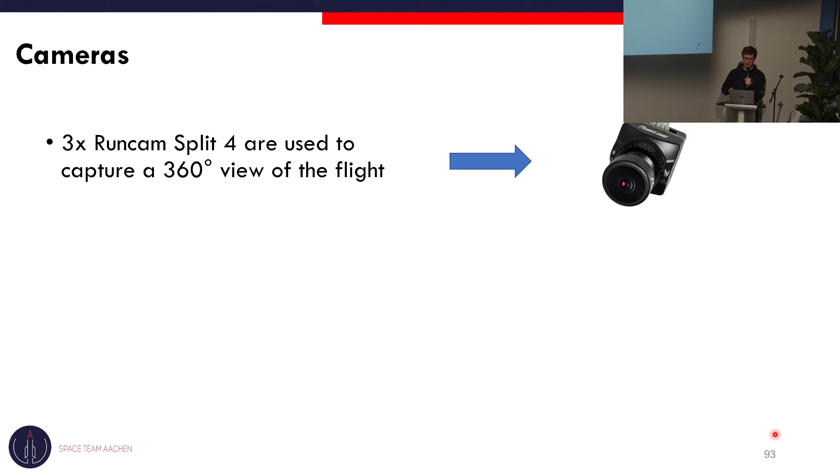Moving on to the cameras, we are using 3 RunCam Split 4 cameras. Those are the same cameras that are used in the auxiliary systems for our separation cam, and they are very small and should provide a very good video. They are evenly spaced with 120 degree increments in the recovery bulkhead, and can be screwed in just before assembly. So assembly will hopefully be very easy.

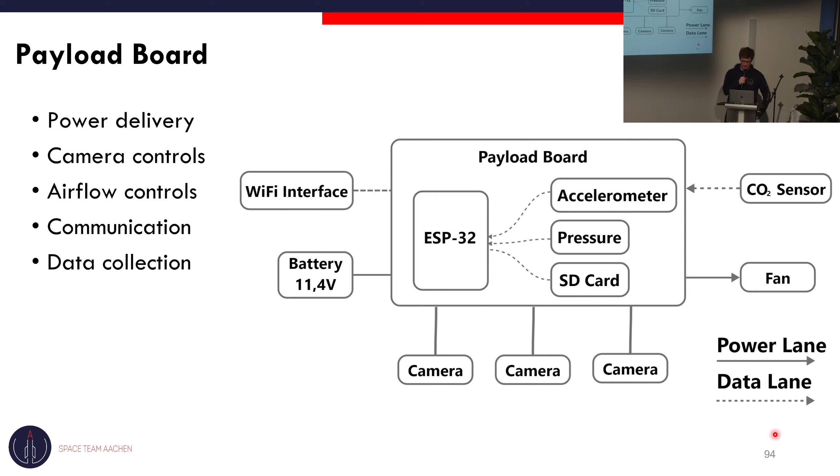The payload board has some main features. It is responsible for power delivery to the payload, to control the cameras, control the airflow, to manage communication and data collection, because we want to start up the fan and the cameras just before launch. So we have to communicate with the payload, and the payload board is doing that. And that was it for me, and I will give it back to Jannis for validation and test campaign.

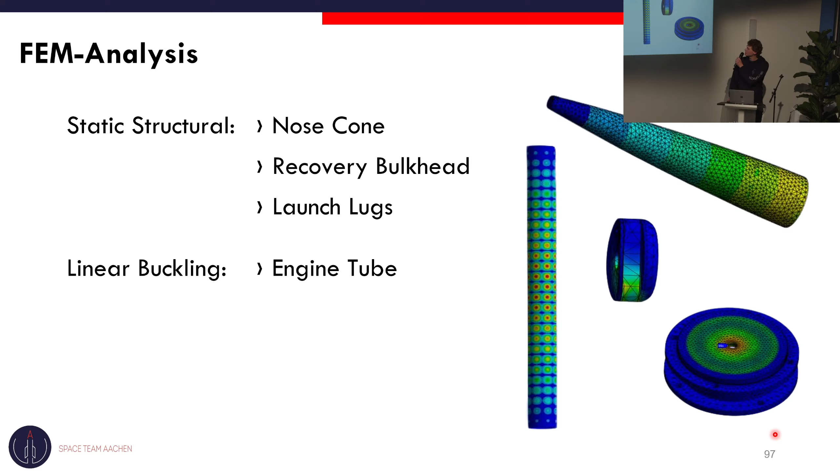I'll start with the FEM analyses. Firstly, we did a bunch of static structural analyses of the nose cone, the recovery bulkhead, and the launch lugs. Then we also did a linear buckling failure analysis of the engine tube. Finally, we have not yet done this, but it's planned: an upcoming drop test simulation of the boat tail crush core.

The crush core is part of a bachelor thesis that is upcoming, so those analyses will also be part of this bachelor thesis. In the interest of time, I won't go through each of the different analyses we did.

But I do want to talk a little about the buckling failure analysis we did. The engine tube is the most interesting one, as it's the longest tube and therefore most likely to fail due to buckling. The maximum load we expect is 5 kilonewtons, and with those parameters, the predicted failure is over 160 kilonewtons, resulting in a massive safety factor of over 30.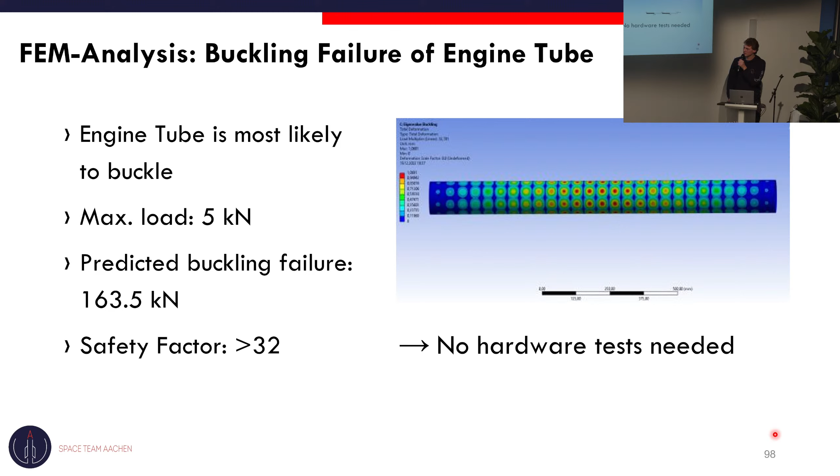We were quite happy with this because this really high safety factor enabled us to decide that we were not going to do any hardware testing for the engine tube or the tubes in general, as the safety factor is high enough for us. This allowed us to save valuable resources and time within the last couple of months, which saved our sanity a little bit.

Moving on to the material tests, we did a test series where the goal was to find a high-performing and reliable surface pre-treatment combination for the adhesive joints in our system. The adhesive joints are how we connect the aluminum bulkheads to the carbon fiber tubes.

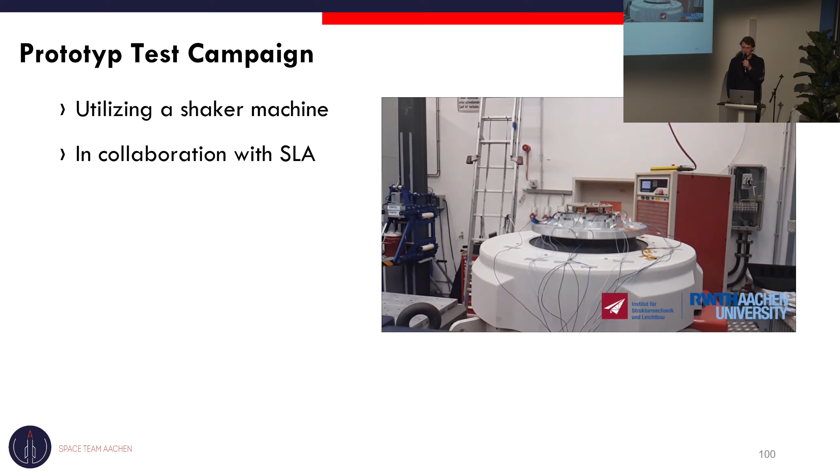We're doing this in collaboration with the SLA, an institute here in Aachen focusing on structural mechanics and lightweight design. In total, we did 5 tests, each a full-scale test, and we're using a mass simulator to add mass so we can approximate the real loads we're expecting.

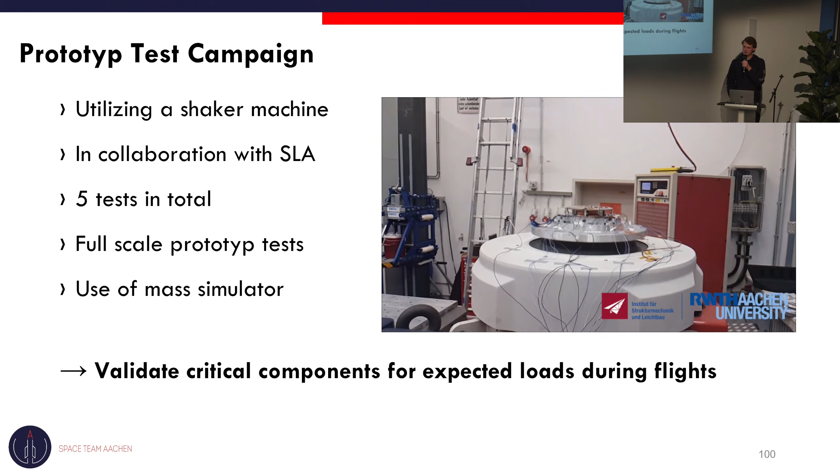With this test campaign, the goal was to validate the critical components of the structural design of Aquila in regards to the expected loads during flight. The first was an adhesion test where we wanted to validate the strength of the adhesive connections between the bulkheads and the body tubes, using a shaker machine at the SLA for this purpose.

We used the selected pre-treatments from the material test series in the previous slide. The shaker applied an acceleration of 50 Gs, resulting in a calculated tensile force of 8.1 kilonewtons, which, as our test article passed, validates our adhesive surfaces with a safety factor of at least 1.6.

Another critical component is the recovery bulkhead. With this test setup, we wanted to validate the strength of the recovery bulkhead for the forces that are going to occur during the main parachute deployment.

We applied an acceleration of 25 G, and in this case, this is a full-scale prototype, but we simplified the design a little bit to make the manufacturing process easier. For example, we did not manufacture the recesses where the covers would fit and get mounted onto the bulkhead. However, as this does not really affect the structural integrity and strength of the component, we simplified the prototype to make the manufacturing easier.

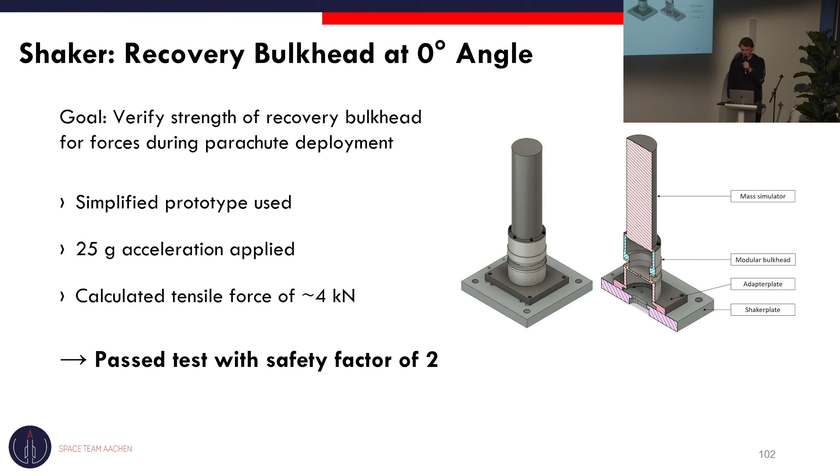This one is a variation on the first one, but this time we firstly added the anchor point so that we also validate the anchor point and not just the recovery bulkhead. And secondly, we designed the test in a way so that the force insertion is at an 8-degree angle.

Why 8 degrees? Well, the recovery tube extends up above the anchor point, and the recovery tube basically limits the maximum angle with which the parachute cords can pull on the anchor point. This turns out to be 8 degrees in our case, which represents the worst case, so we wanted to cover that scenario.

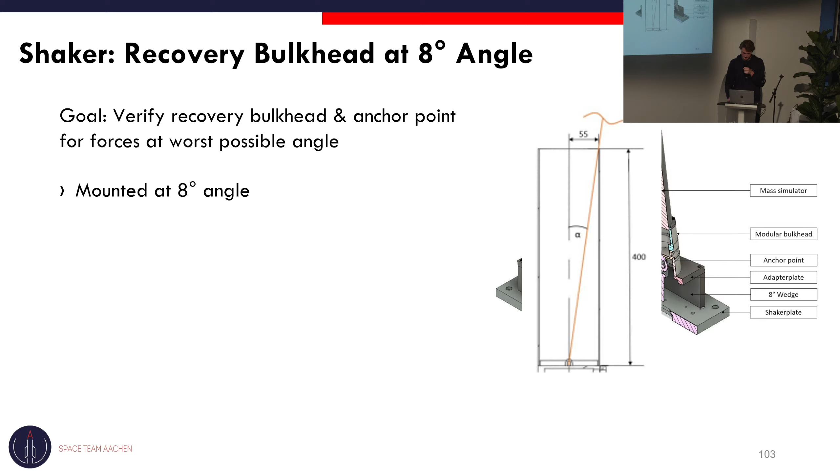Like I said, we included an anchor point in this one. We also added a load cell to confirm the loads that would occur during the tests. We did this because we actually had the space to add them right about here.

The shaker applied an acceleration of roughly 16 Gs, which resulted in a measured and confirmed tensile force of 5.5 kilonewtons, which in turn validated our test article for a safety factor of 2.75.

Lastly, another critical component is the entire nose cone assembly, as it houses the avionics. If something breaks during launch, it spells major problems for us. So we also wanted to verify that.

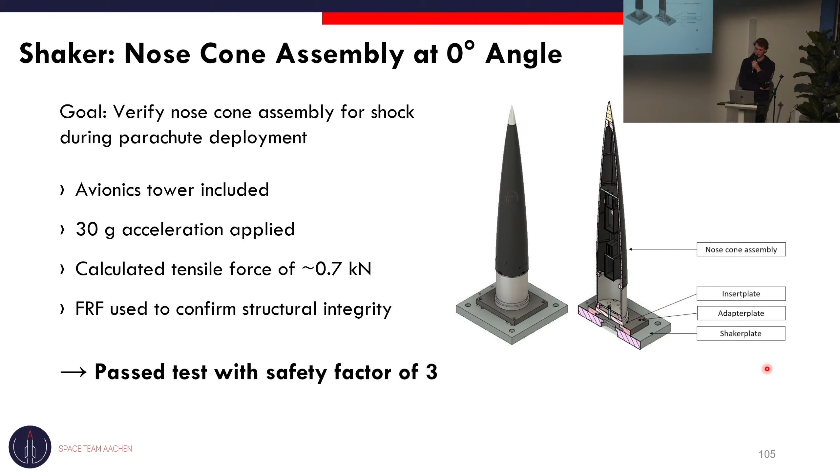We're happy with that, because for the nose cone, there's a lot more uncertainty compared to, for example, the recovery bulkhead or the engine tube. So we aim for a higher safety factor to compensate for this uncertainty.

Finally, once again, a variation on the previous test. In this case, the worst possible angle that the parachute cords could pull on the nose cone is 90 degrees, so we wanted to test that.

Also this time we once again included the anchor point. The shaker pulled on the test article with an acceleration of 50 Gs, which results in a test force of 1.2 kilonewtons.

I do want to point out that the accelerometer at the nose cone tip measured over 300 Gs, which is, in my opinion, really quite a lot, and speaks for the strength that our design has.

Finally, we used frequency response functions to validate the structural integrity. The design passed without any trouble, and in this case we went a lot further and actually validated for a safety factor of 5.

Once again, here's a quick slow-mo video of the test, and you can clearly see the whole nose cone bending.

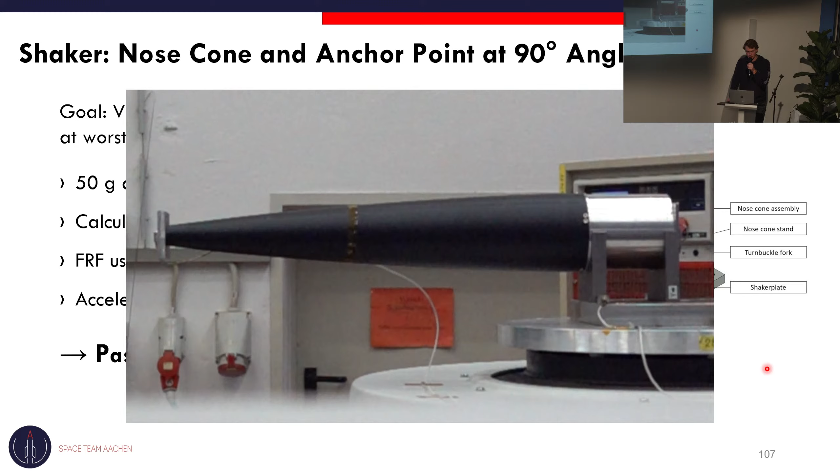Okay, and with this test, we concluded our shaker test campaign, but we also tested the fins, as they are also quite hard to analyze using things like FEM, because for example the layup structure of the glass fiber is quite complicated, and so we wanted to make sure to validate the strength of the fins as well.

Then ratchets were used to slowly increase the load up to a load of roughly 90 Newtons per fin. We did not observe any defects, any cracking or any bending, and so the fins are validated with a safety factor of 2.5.

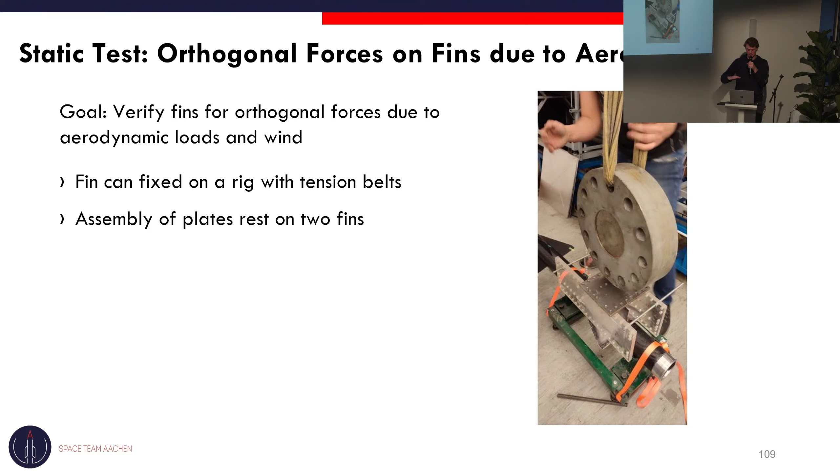And then last but not least, we also needed to check for the orthogonal forces that the fins would experience. Those forces are also due to aerodynamic loads, but also due to wind. For this, we fixed the fin can onto this rig, and then used a couple of acrylic plates that rested on 2 opposing fins.

And then we added weights on top to go up to a load of roughly 950 newtons per fin. Once again, we did not observe any cracking, bending, deformations whatsoever, and so we are confident that the fins will be strong enough for launch, as we have validated the design for a safety factor of 3.8.

And with that, we concluded the test campaign and validation phase of the structures team, and I'll once again give the stage to Florian. Thank you.

Hello. Now I'm going to talk about the tests that we did for our recovery system. First off, we have an ejection test. This test was performed with the whole nose cone assembly, but only with one tank and one valve, as seen previously in the presentation.

As you can see, the nose cone flew quite far. It had a velocity of roughly 12 meters per second when it exited the recovery bay tube, and this should be sufficient to pull out the rest of the recovery system from the tube.

But further tests will be done to verify that, so we will put a parachute bag with the main parachute and a drogue parachute inside the bay and do another run of ejection tests to validate the deployment.

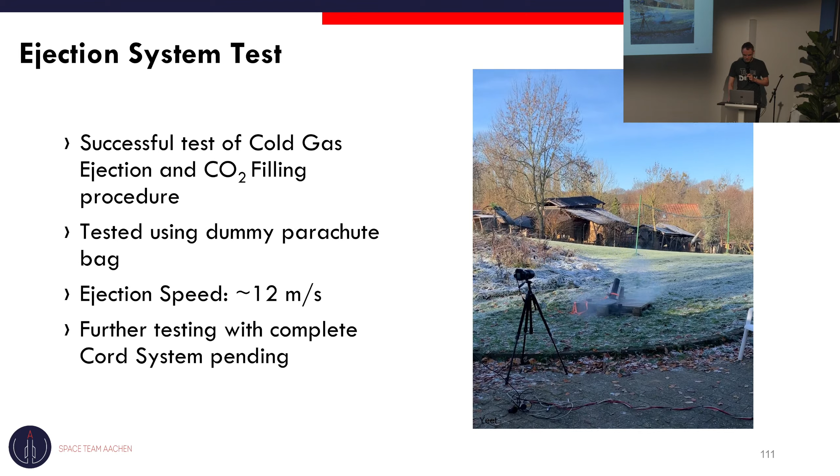We also tested our parachutes with the help of the STAR project. They built a test sled that can be attached to a winch that's normally used for glider planes or to launch glider planes. We pulled it with a velocity of around 60 kilometers per hour, and we had a test parachute with a diameter of 1.5 meters.

We measured the drag coefficient, and we determined a drag coefficient of 0.78 with a vent hole size of 14%. That's the most suitable for our application.

To do this, we attached the parachute to a load cell at the back of the sled and an anemometer on the top, so you can see the wind speed and you can see the drag, the force with which it pulls the parachute on the load cell, and so you can calculate the drag that the parachute has.

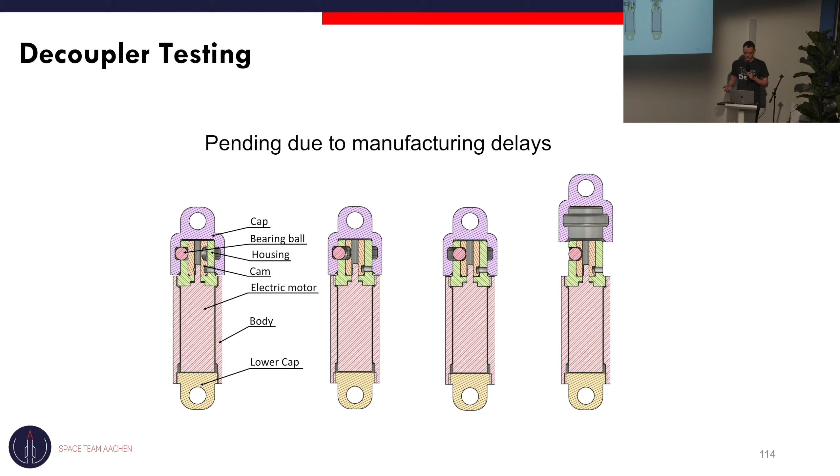We also will do a full scale system test, so everything put inside the nose cone and ejected, and then released, and then release the main parachute and see if everything functions correctly. Now I give over to avionics with Johan.

Thank you very much. I'm going to walk you through the validation of our flight computers. As already mentioned, we have two main mission goals. The first one is to deploy the parachutes, or trigger the deployment of the parachutes. And the second one is to find the rocket.

If we achieve 9 kilometers, that should be far more than we actually need, according to simulations of the landing site that we are expecting in the desert. These tests are going to be conducted as soon as our teledongle arrives. The teledongle, as already mentioned, is the receiver that we are using for the Telemega, so we can do a full system test as soon as it arrives, which we expect in early March.

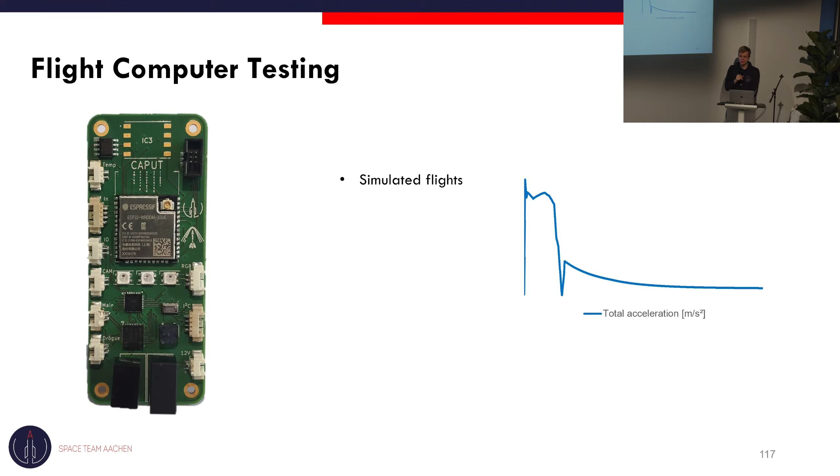The second validation method is using a small scale flight. As the physics are quite comparable to a large scale flight, we can use a small scale flight to verify our software and our sensors.

And the last and biggest option is a full-scale rideshare mission with our flight computer in another rocket project that might be able to carry our own flight computer inside their rocket, and that way we could verify our whole system using the sensors and the algorithm to determine apogee.

That's it from avionics, and I will go over to Fisnik to talk about our own test flight. Thank you very much.

Yes, let's talk about a test flight. That's the last part, and I would say it's probably the cherry on top of the ice cream of testing. Where can you actually launch a rocket in Germany? Well, here at Modellfluggruppe Quax.

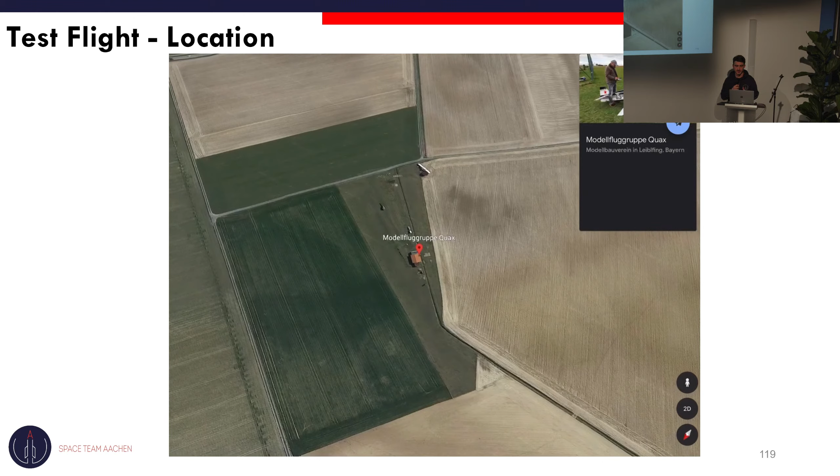It's actually an association near Straubing, that's near Munich, and they already participated in cooperations with, for example, the Technical University in Munich or the Technical University in Vienna, where they already made rocket launches. We talked to them and they gave their okay to make a test flight in late April.

Where will it be? It will be in Straubing, near Munich, and we will try to reach 1,500 meters of height. So it will be a small-scale flight. How can you achieve a small-scale flight with a rocket that's actually prone to go 9 kilometers?

Well, let me show you something. We have this little bad boy, and this is actually the rocket motor of Carl 1, the rocket that flew in 2020 at the Euroc. This has significantly less impulse, so we will reach, with a little bit of extra dummy weight, a height of 1,500 meters.

As I already said, the date will be in late April, somewhere between the 20th and the 30th of April. The main goal is, aside from obviously testing all of our systems in full integration, like the recovery system and avionics system, giving them a full stamp of approval. Other than that, it will be a chance for us to test all the launch procedures and the concept of operations in a realistic scenario.

So, what's next? We're coming to an end slowly. You can see this beautiful building. This beautiful building is from the Spaceport America Cup, from Spaceport America actually. And yeah, that's next. So we're going now into the assembly and production phase. Hopefully, our design will be frozen very soon, and then we can produce and assemble the whole rocket until April and go on this incredible journey with this incredible team.